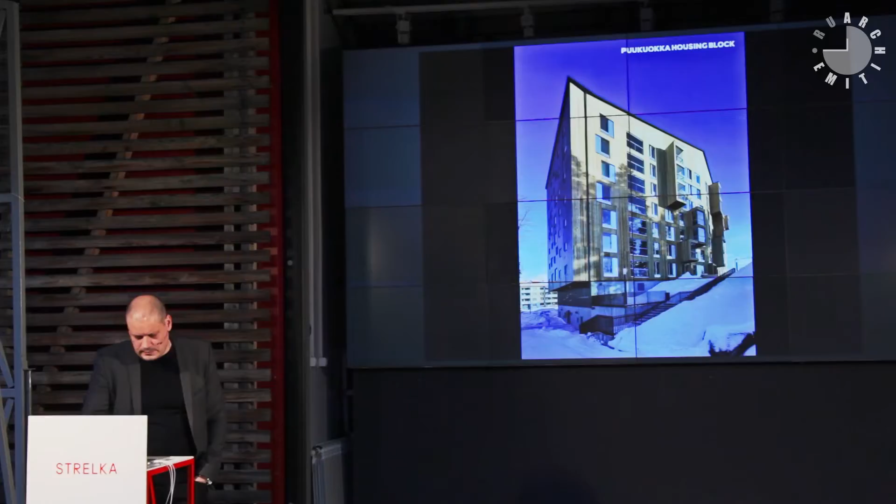All right, Puukuokka apartment block is some kind of example of housing on a large scale. Typically we use wooden construction in smaller buildings in Finland, as I think is also the case in Russia, and not so much in bigger housing projects. But in 2011, we changed the regulation so it's possible to make an 8-story building using wooden construction. So this is more about using wood on a larger scale.

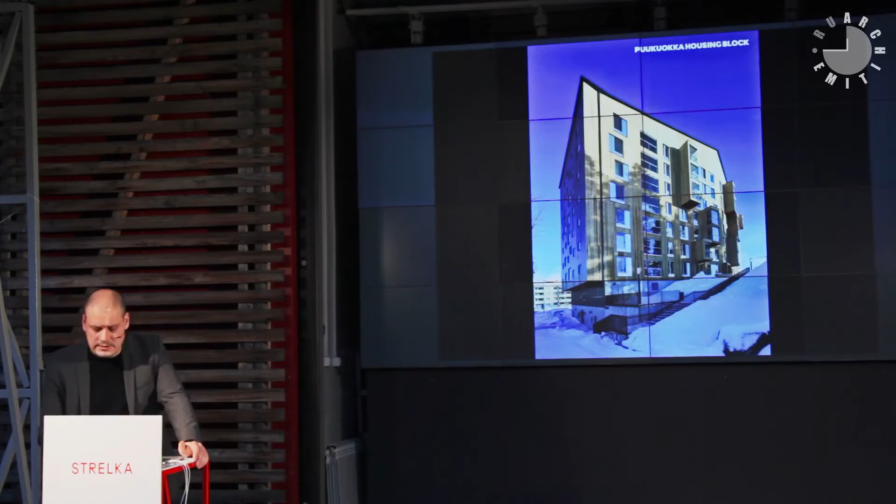We started that quite a long time ago, and the process of how we started was quite funny. We had just finished the Kuokkala church, a wooden church located very close to this site. Jyväskylä is in the middle part of Finland, with 150,000 people living there, so in Finland that's a big city. But this is the nearest suburb of Jyväskylä center. We designed the church, and it was ready in 2010.

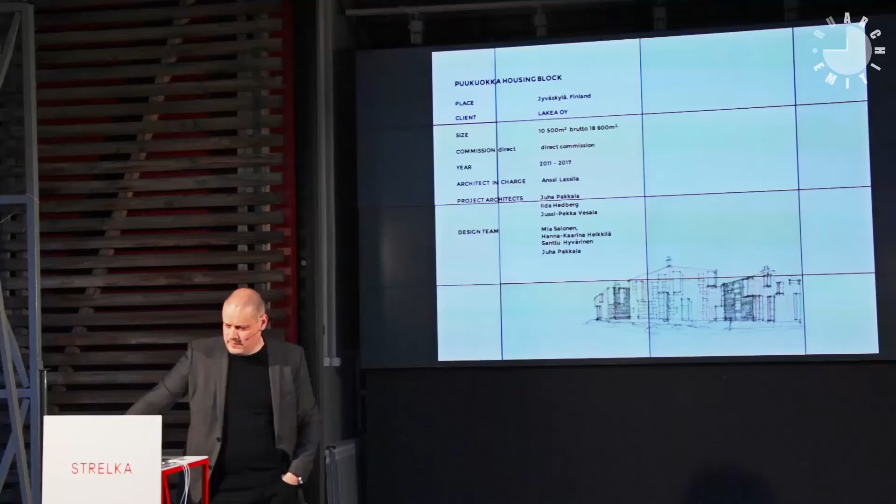There was a magazine story that one construction developer company would build a wooden housing block at this location. So I called this company and said we are architects and we want to design your housing block. We don't have any experience, but we can survive - trust me, I'm an architect.

After two weeks we started designing this. We didn't have any kind of experience or sense for using wood at that scale of building. So there's 200 apartments at 10,500 square meters.

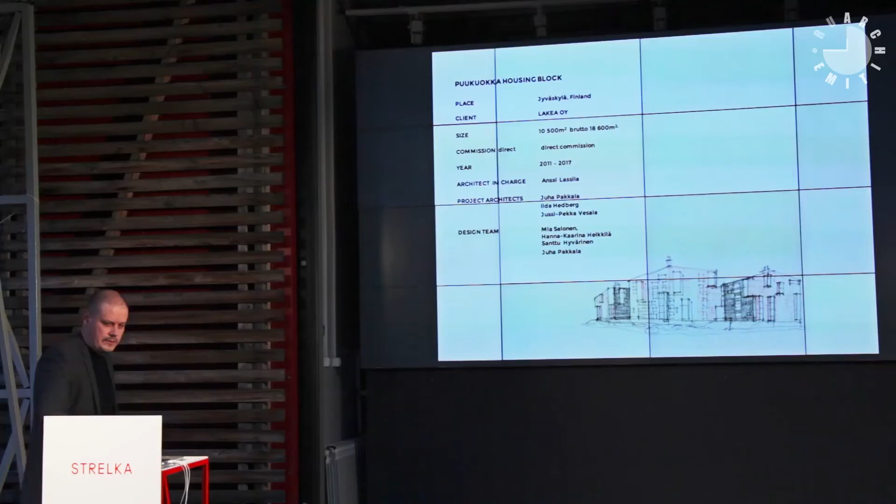At the same time, Stora Enso, by the CLT factory - there's a cross-laminated timber factory in Austria - started to make some prototyping for the multi-story element system, using these CLT volumetric cubical elements.

So we started to make very simple sketches about what's happening if you're using these cubical elements for this housing project. What does it really mean, how can we create better architecture, how can we really create a solution that starts from the materials and gives the people who live there something different than the usual housing process.

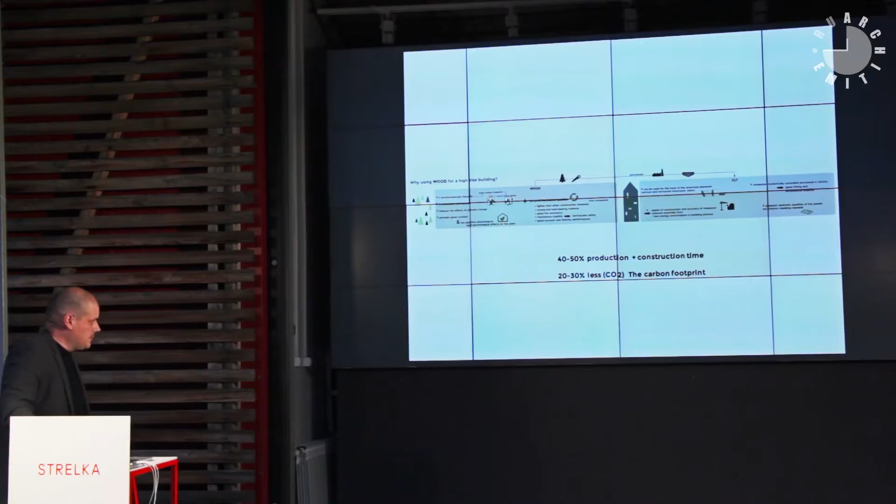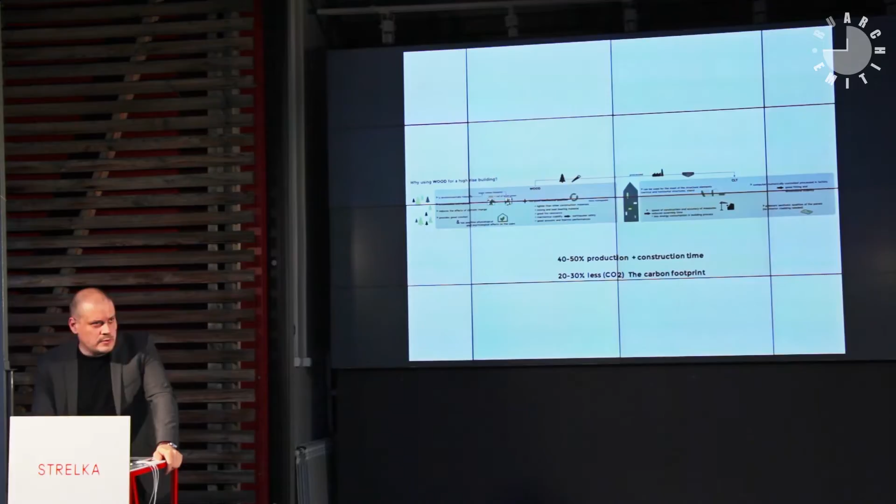And of course the question is, is there any sense to make that kind of solution using wood? But a very basic calculation tells that about 40 to 50% of all the energy or pollution comes from the construction process and construction time. So it means 20 to 30% less CO2 or carbon footprint, without even calculating the new forest growing after using this wood material. So in the future, when we must take care more and more of the environment, it really means using wood at a large scale.

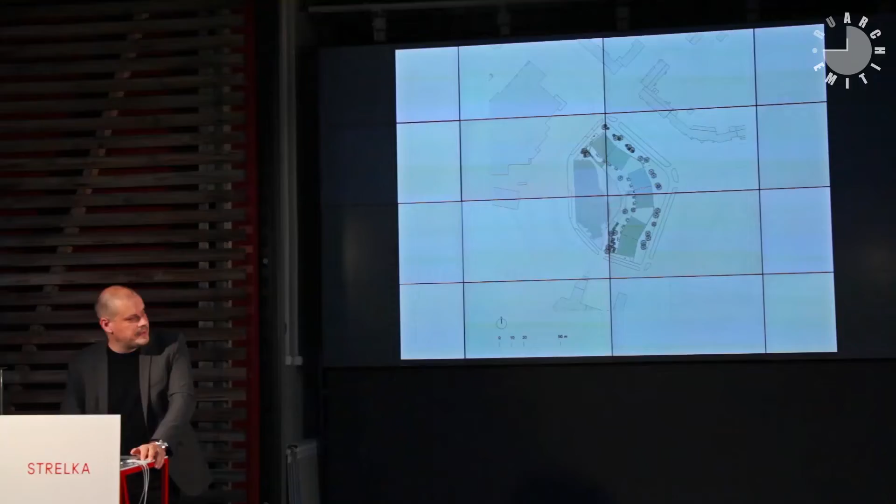We compress all the cars under the buildings, and that's the way it goes. At the end of 2014 we got this first 8-story building ready. It's a simple building - just painted spruce outside, and Siberian larch in the courtyard side, with basic ideas like that.

So we have two elements joined together to make one apartment. There's one 'wet' element, meaning bathroom, kitchen, and entrance area, and the other is a 'dry' one. Well, it works very well this way. All the technical things are integrated between the apartments and the corridor, and that's the reason the space between the apartments is bigger than usual.

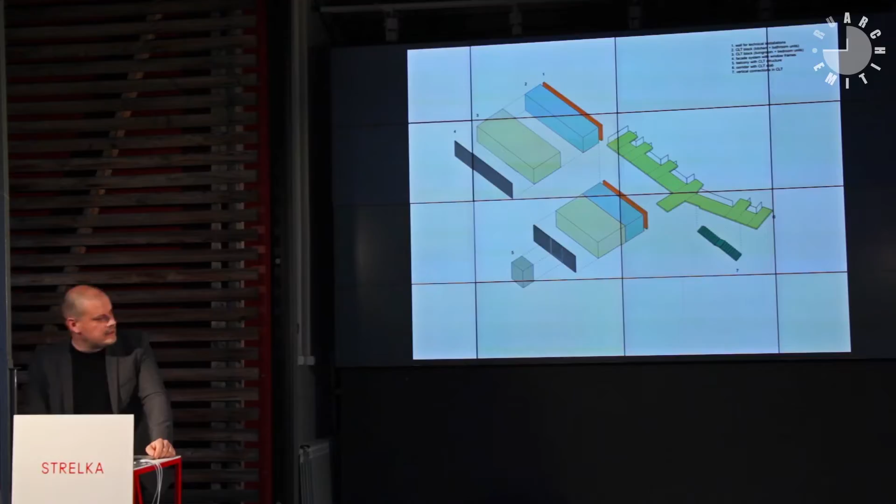When we made this kind of solution together with the city, the developer, and everyone else, we also got good regulation about the master plan, so it was even possible to get this kind of system ready.

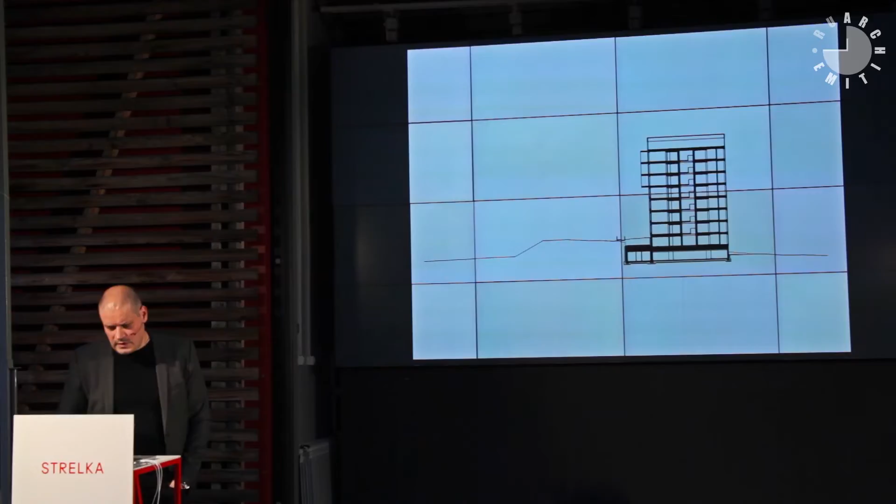These volumetric elements are really the primary structure of this building, meaning that everything above ground level is a wooden construction. There are no columns of steel or other materials, and even the elevator core is made of CLT.

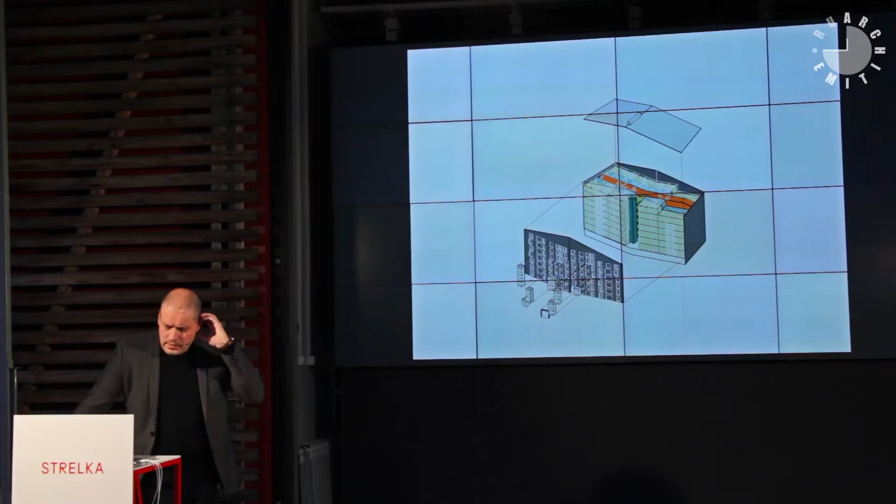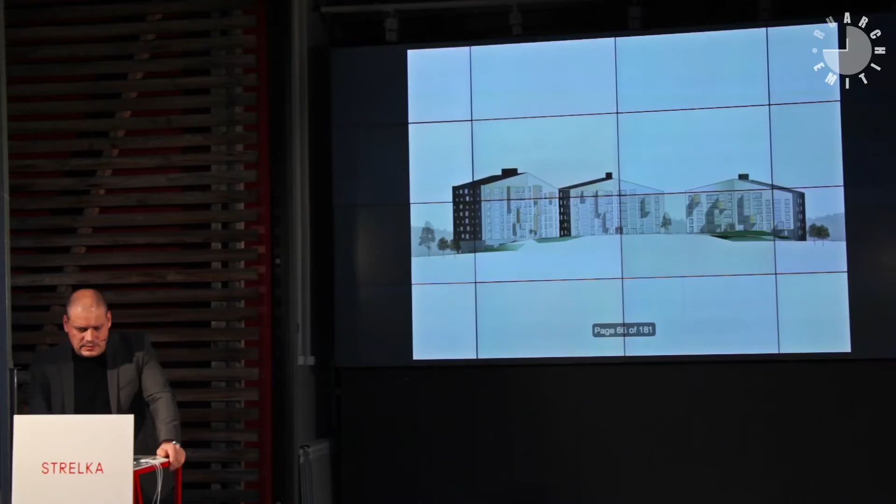Now we just got the first one ready, and the second one will start quite soon. Let's hope that the whole block will be ready in 2017.

I won't talk too much about the details because maybe it's not so interesting, but the basic idea is the dry element joined together with the wet one, with these technical things integrated in the corridor. The space between the apartments is much more spacious and has more light than usually.

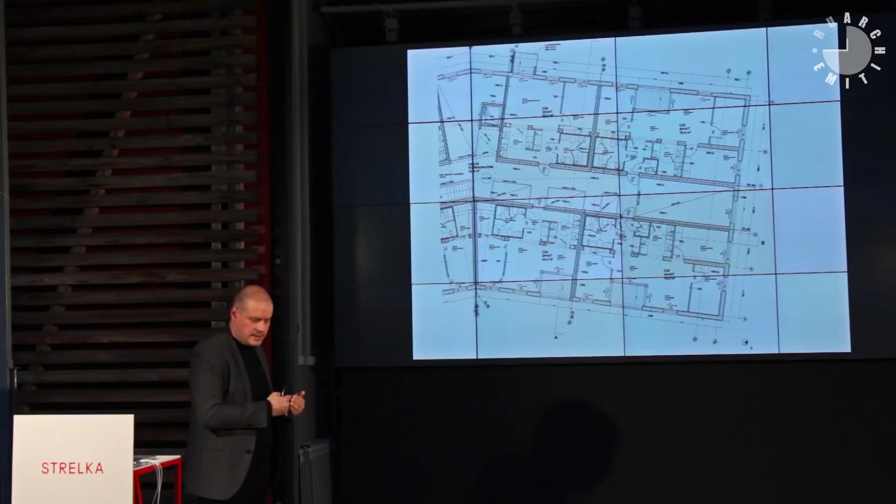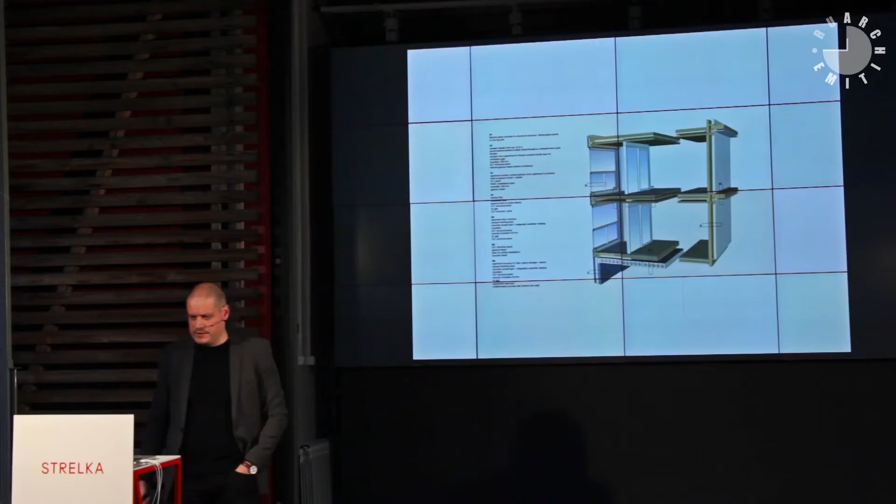It's also a semi-warm space, just because it's too expensive to keep it heated in the winter time in Finland. The basic construction is wooden - the floors and everything are wood, joined together with steel joints. So there's steel at the joints, but everything else is wood.

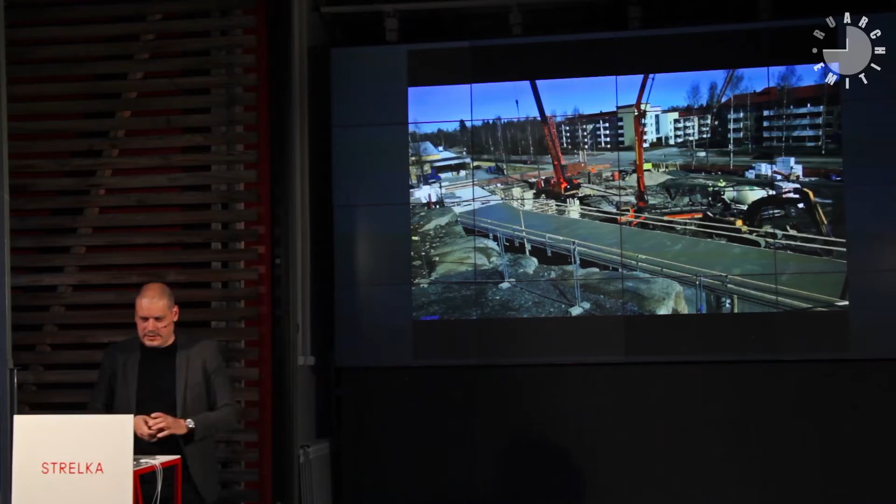What's the reason to use this material? Of course there are a lot of good points. Even in a more urban structure like this one in Jyväskylä, here in Finland - this isn't super dense, but anyway...

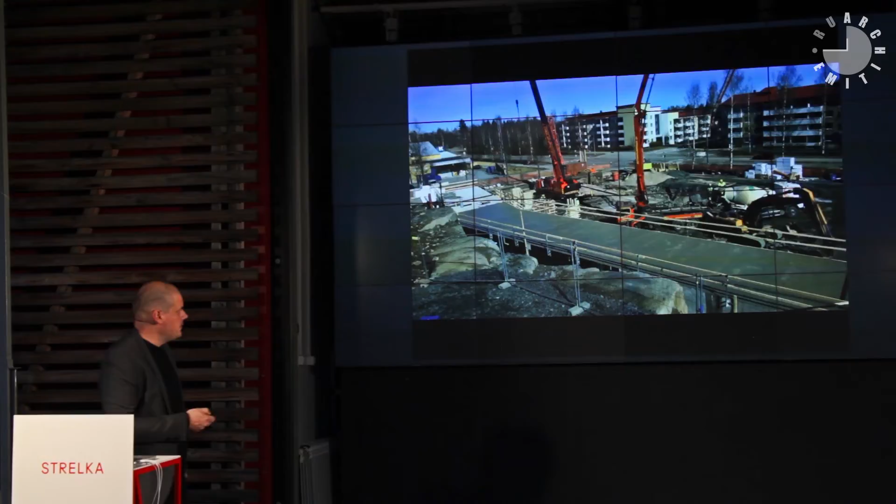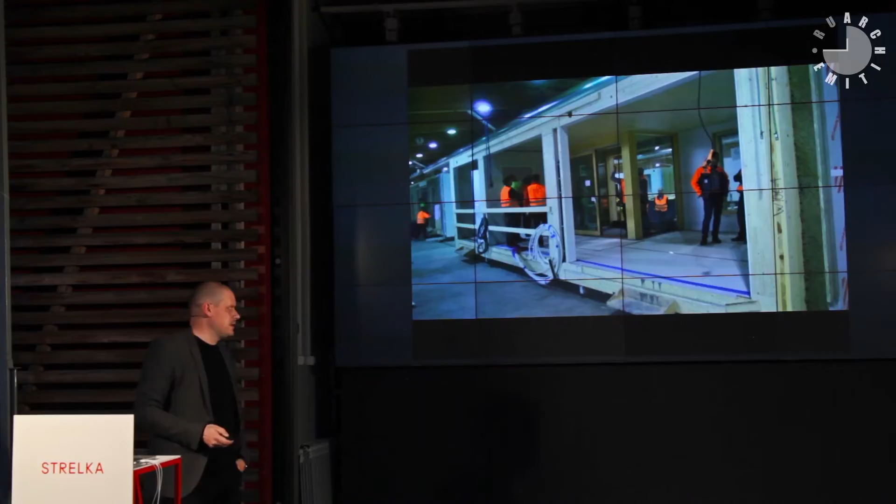At the same time they start making the concrete works on the construction site - the car shelter, the basement - they also make these volumetric elements in the factory. Everything is made ready there: all windows, all furniture, all surfaces, ceilings, walls, kitchens, and even bathrooms are installed ready in the factory. This makes the construction process very fast - it takes only half a year to get this building ready.

If you think about the more urban structure, like for example Moscow, it's less noisy, less dusty, less time for the construction process. So people can move in faster, they can use the building faster than typical construction. So there's one good point, or a few good points, when they use this kind of construction.

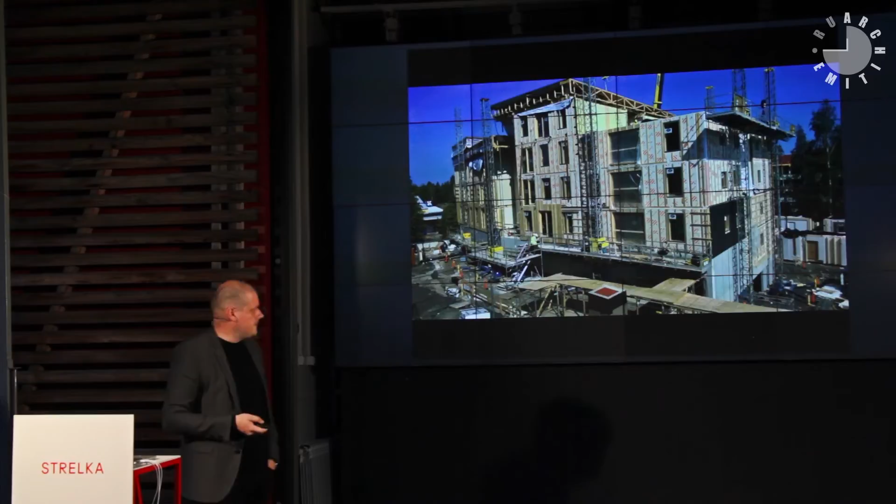In this case, we didn't integrate the facade direct to the elements, just because I don't want edges between every element. So it's prefabricated, but it's installed on the construction site step by step, when they install these volumetric elements at the same time.

Well, there's boring pictures, I'm sorry for that. Just pictures for the corridor spaces, just because this was the only place what they really made on the construction site, and the reason is all technical things are integrated in the walls, as I told earlier, and it's also the reason that there's a little bit more space than typical in a corridor.

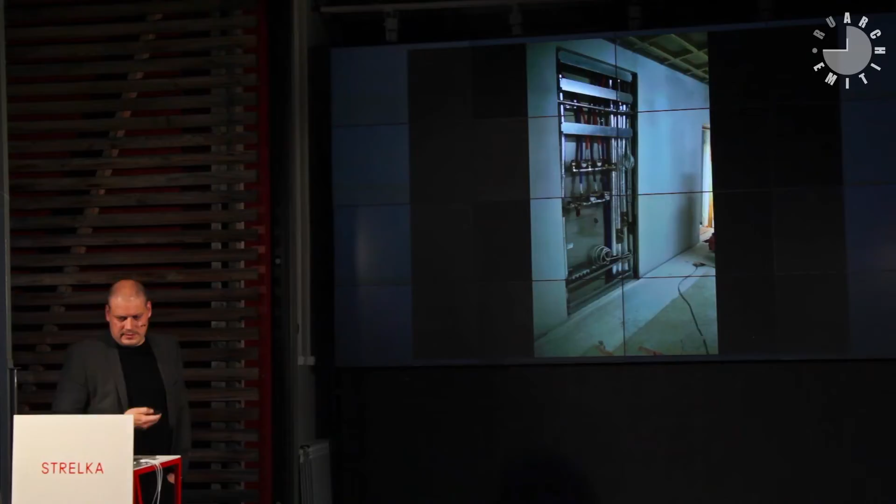And why I talk about that is quite important: if you have very effective apartments, these places where everybody can use are more spacious, more lit, more different than usually. I understand it's a quality of the living for this apartment project.

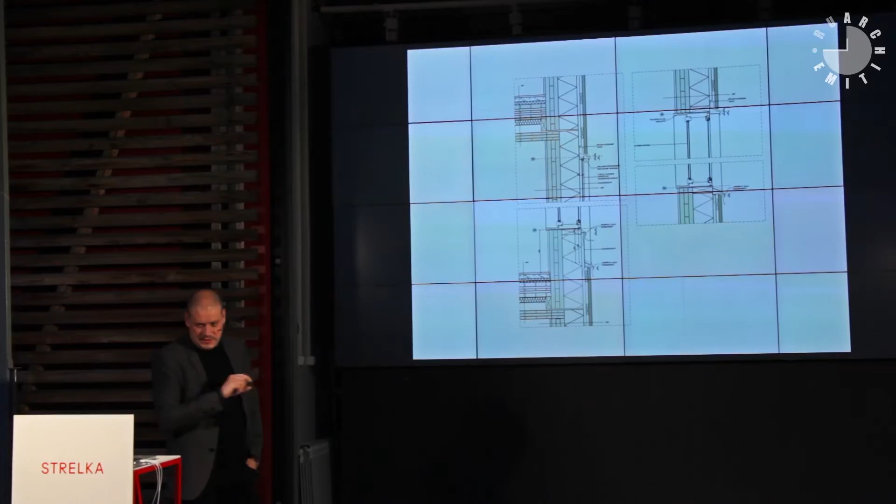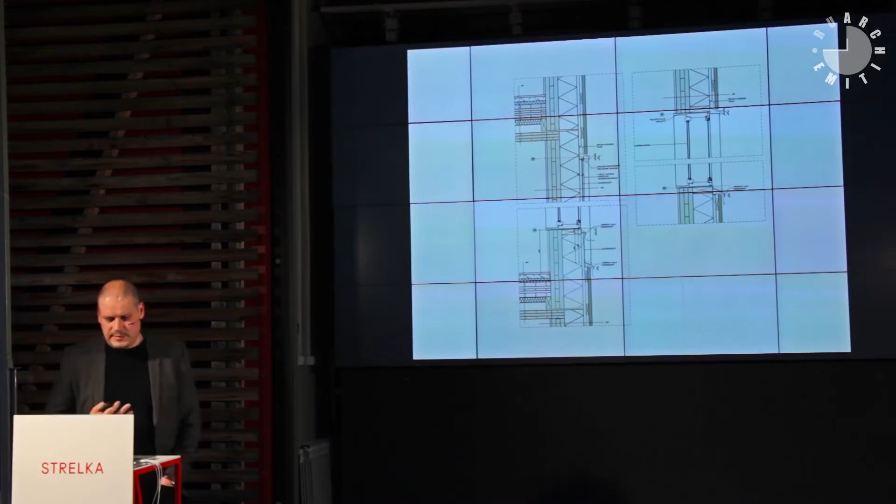There you can see the basic idea about using the CLT. This is the upper part of the ceiling, the floor. There's of course layers for the integration. The concrete is a very thin one, just for integrating the floor heating, what we need in Finland, and an air gap between the elements just for acoustic reasons, because acoustics is one question when you use wooden construction in this kind of case.

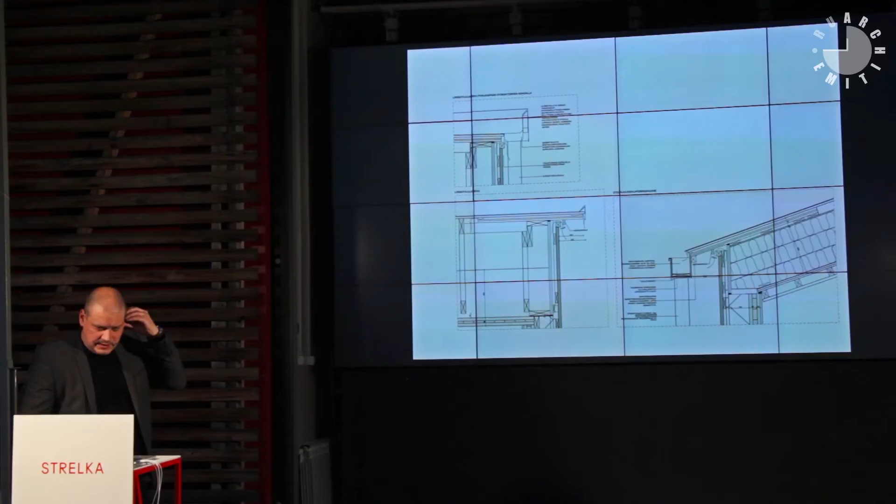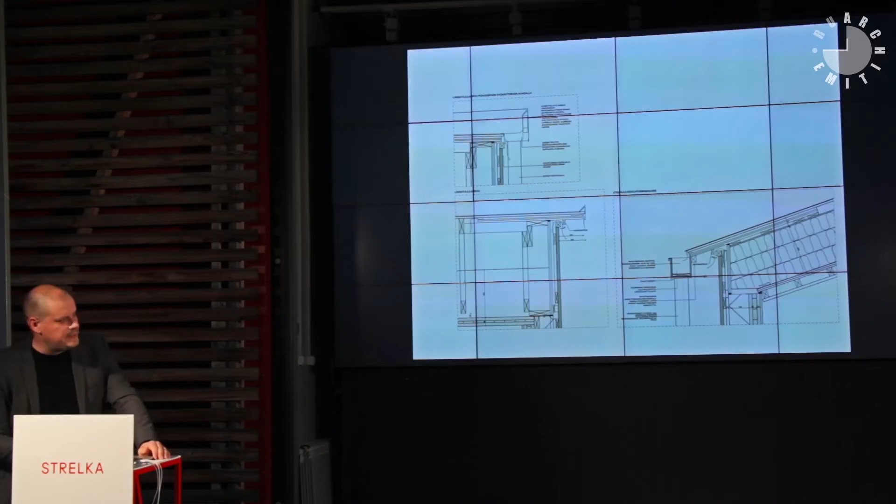And some details. Because with the wooden structure you must take care, for example, of the eaves and all kinds of details, how you join together the wooden pieces and how you really make it in real life. Just a picture of the ready-made building.

We have quite tight regulation in Finland. I don't know about Europe, but I think it's even different in every place, because in Europe, for example in Scandinavia and the southern part of Central Europe, there's quite different rules in different countries. But in this kind of place, you can just use wood on the floor, but everything else must be covered by gypsum board. And you must also use the sprinkler system for the whole building.

And this building is very simple. I mean, there is no very expensive apartment, the apartments are not low price but mid price in this location. What that means is that all the details, those kinds of things, are not very high quality. It's more a question of the quality of using the parameters and the whole solution. For example, the balcony is integrated inside the building frame in these cases, and it gives one extra room inside the apartment.

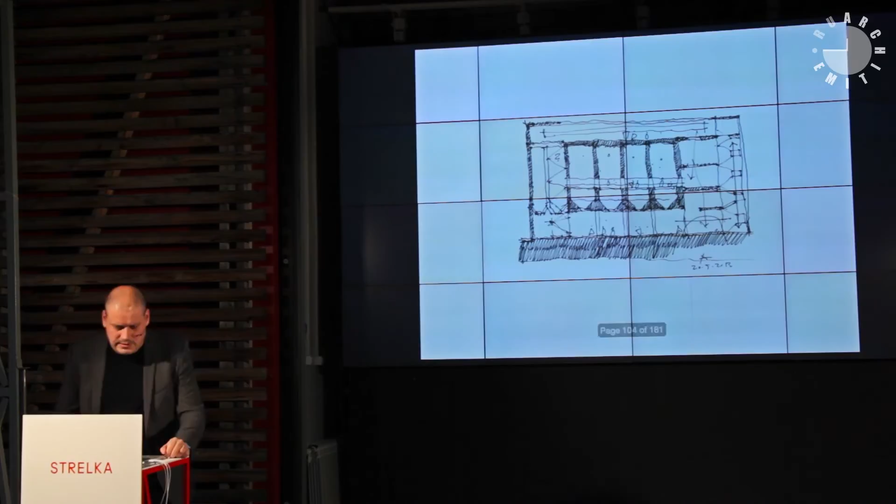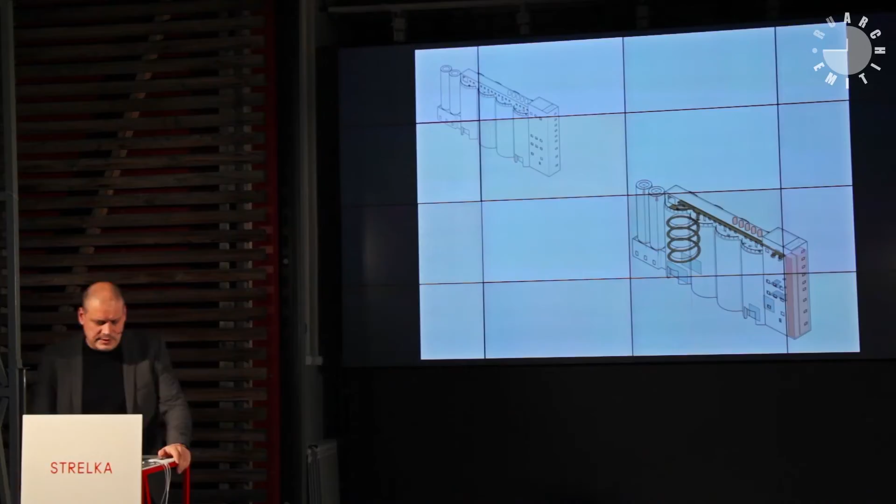So we made this matchmaking workshop, and the idea was to reuse this building for an architecture experience, just for exhibition. For example, the old silo factory was used for a very robust experience, the feeling of contrast between the old and new things. We worked there about one week, and after that the Chinese architects kept going on with the details and building codes.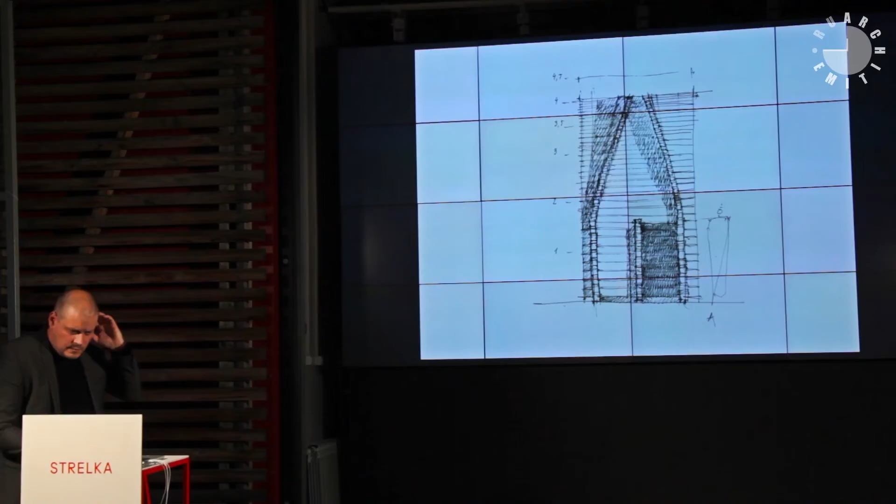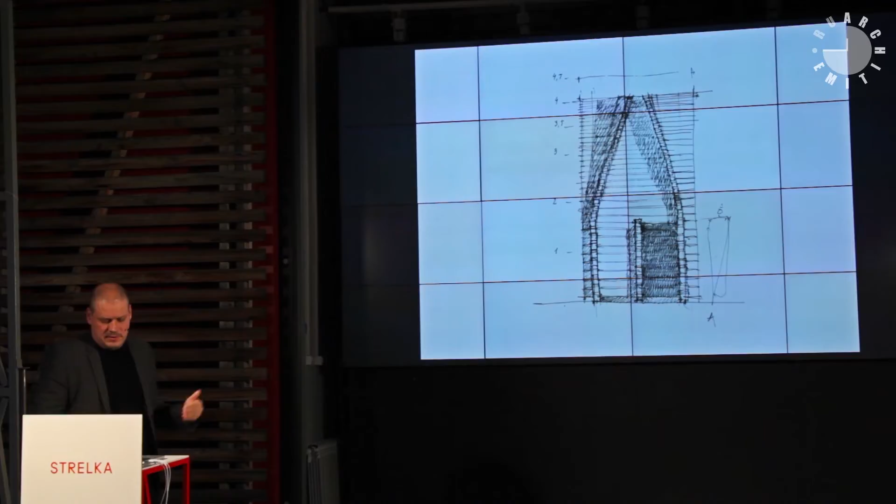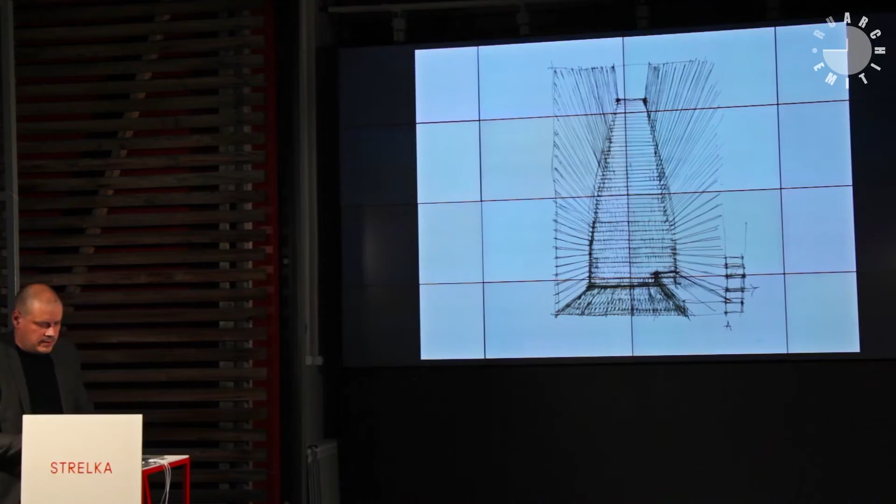OOPEAA was asked to make an installation, so we started designing a contrast between wood and concrete, to build it in Finland and transport it to China. There was also an idea to create an event between the Biennales, since the architecture of the Biennale changed. So we thought we'd make a log structure in Finland, transport it to China, and build it there. Between the Biennales, we would make a translation of this building, a Chinese variation, together with Chinese carpenters.

It's quite interesting how the process goes. This log structure used Finnish spruce, made together with Kari Virtanen, a master carpenter who has made many furniture projects for us. So we have long experience in communication and in using local material, and how that really affects things if we try to make it in China also. These things are quite nice to test as an installation, at a small scale, because there's not such a big risk of making theoretical mistakes.

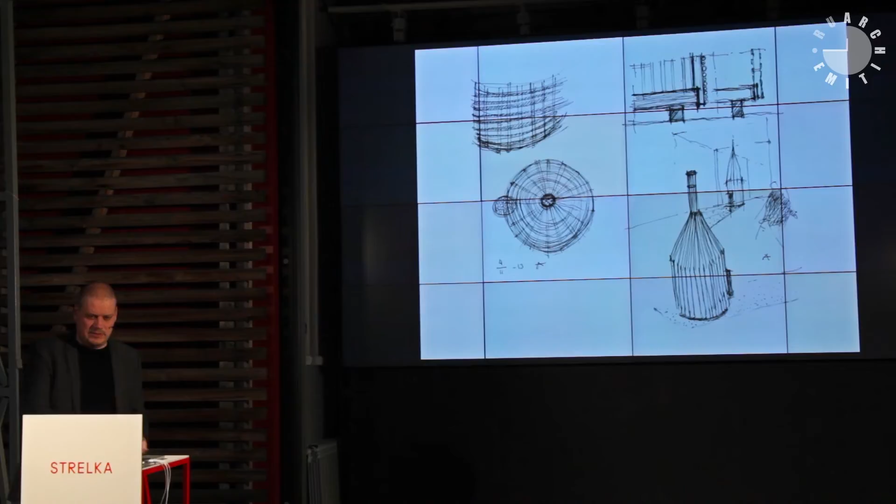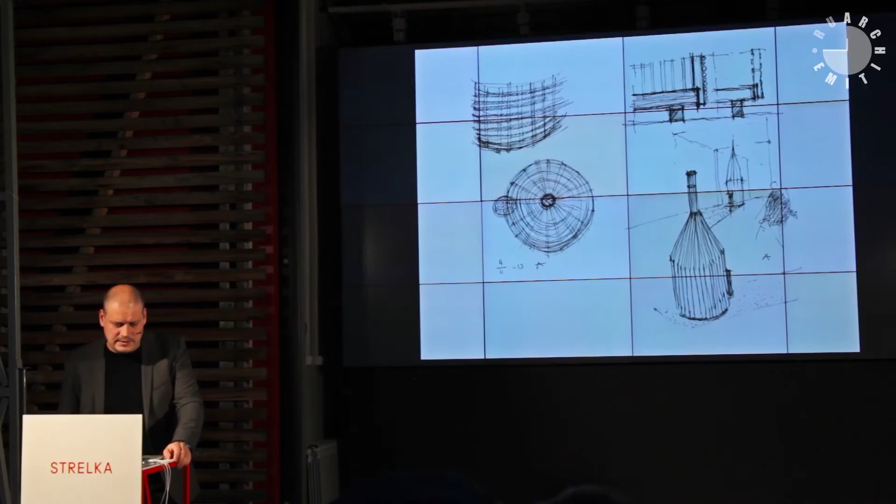Between the Biennales, they started making the installation. But first we designed this spruce log installation in Finland, and started thinking a bit about the Chinese one. The first cooperator we got in China was an old master who wanted to make an exact copy of the Finnish installation using composite bamboo. That would be interesting, but we didn't want that, because I don't think it's very interesting to find that kind of solution.

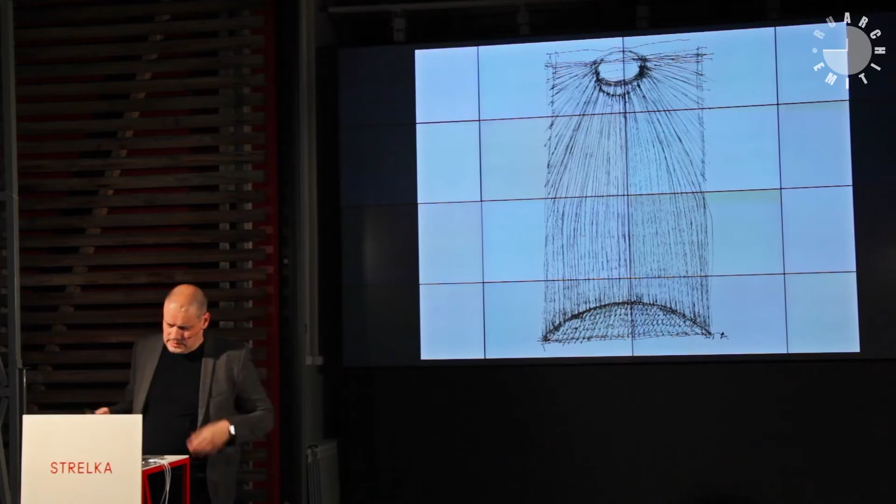So I made sketches using just round bamboo sticks, thinking about how we could create a simple space using that material, in a way similar to handmade work, using people who really know how to do something with this material. So we found Richard in China. He's an expert in using bamboo, and together with Richard and his guys we made a very experimental, simple, small installation in Shenzhen. There's also Kazunori in our office, an architect from Japan working in China who speaks Chinese, which of course helped communication from our perspective.

Step by step, over one week, they made this primitive hut using bamboo. Finally, I think it was a great combination, a very simple way to use the material and create a similarly sized space but with a totally different feeling. It's very primitive, simple architecture, showing what you really need even at a bigger scale, or in any kind of project you can do.

A year later, we transported this installation to the Venice Biennale 2014. It's a different context, in the middle of nature, with different themes. We also used the Aalto Pavilion to tell that story, what is behind everything, and used the pavilion as originally intended, opening the part between the doors and the pavilion. It was really nice to do this at the Venice Biennale too.

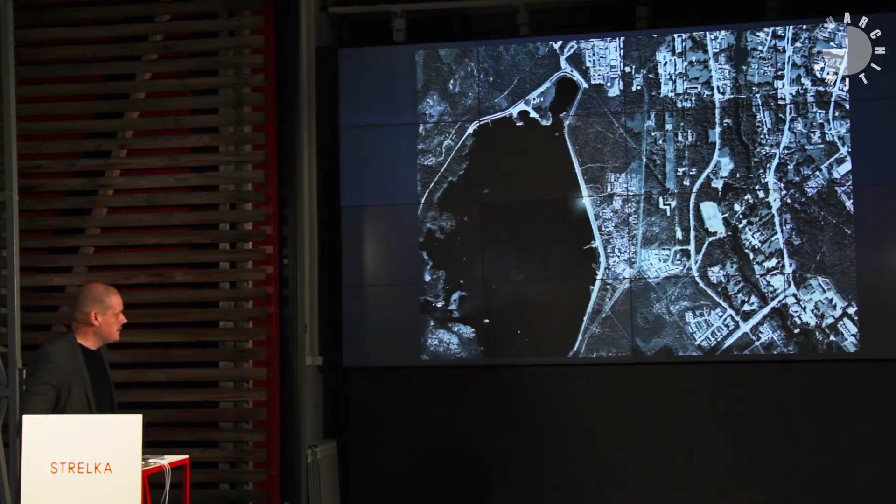The lake was made in the 1970s and is up on a hill, a strange location in many ways. The reason was to generate electrical power, but also to control the water level around this very flat area—two reasons for making the lake in the 1970s. Anyway, it's a place where people hang around, running and skiing in the wintertime. It's also a place where people who can't otherwise get around, for example those using wheelchairs, can move and enjoy nature, because there's a place they can go around even like that. So the basic idea was to make a deck where you can see the landscape in a different way than just walking around.

We tried to make a tower in this wasteland, but it felt very boring.

The problem is that if you want a solution everybody can climb up, it will be very big, with ramps or whatever, and it's quite tricky.

So the simple idea was to make a huge periscope so everybody can see the landscape without climbing up a tower, like a periscope or watching tower.

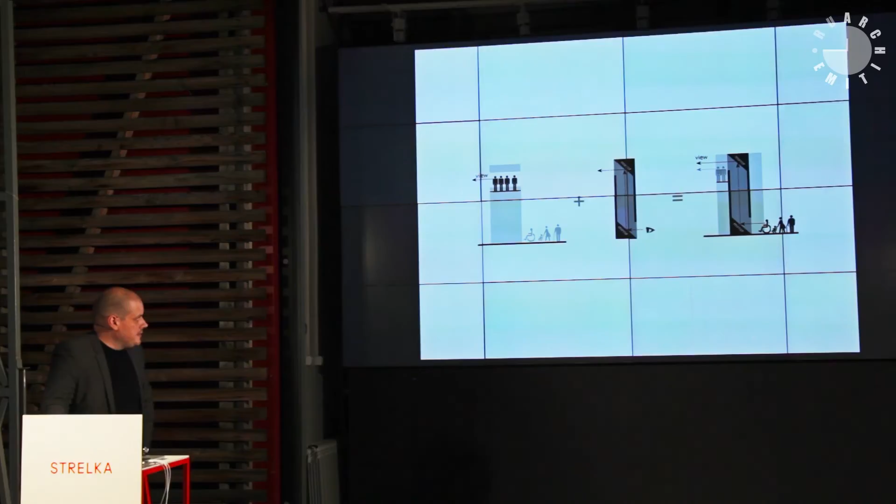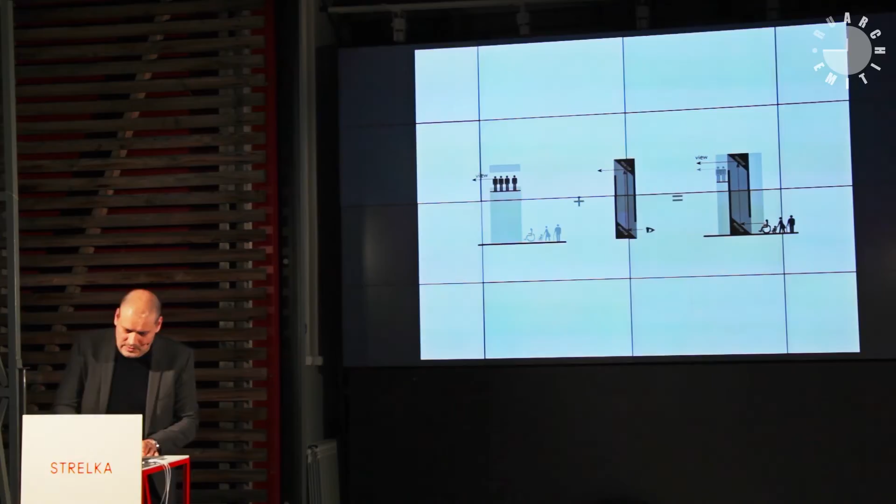It was a little bit like a joke when we started the design process. Everybody can make this kind of periscope when they're a kid, I made periscopes sometimes, but not at this scale. It's 30 meters high. Anyway, the client liked it.

So they simply said they wanted to build it, and we started to make real drawings.

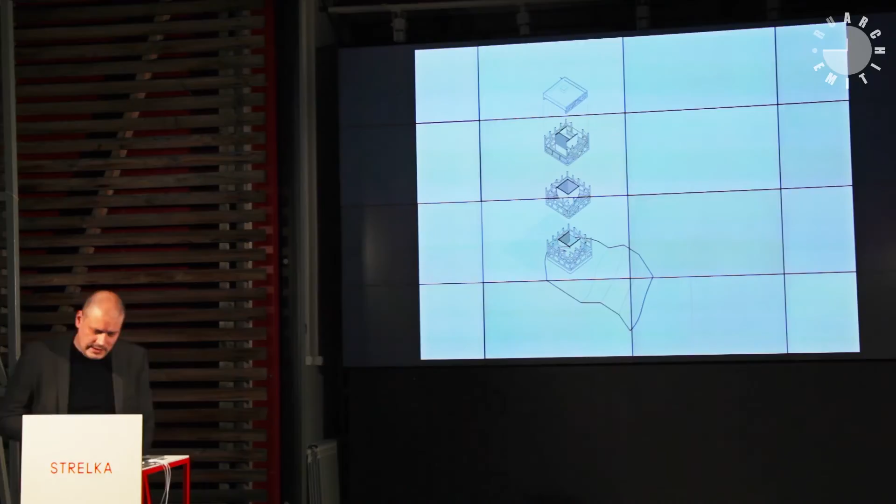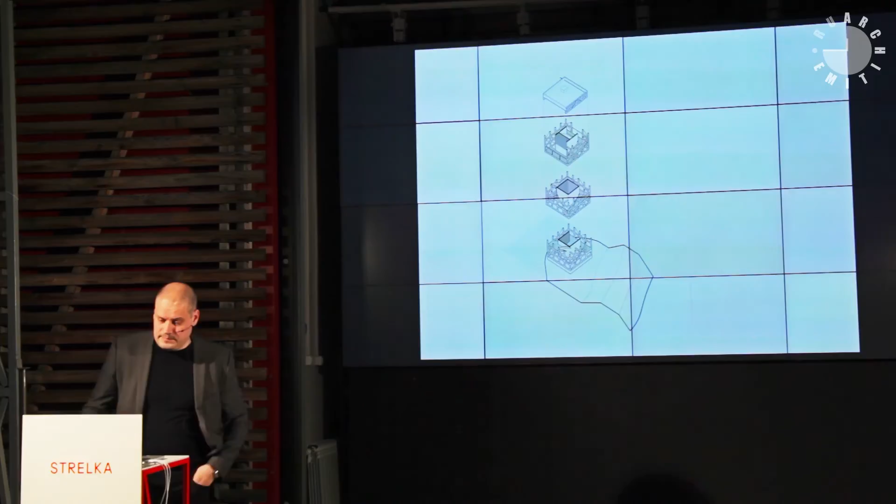The idea was to make three different elements, or even four since the roof is independent, using CLT cross-laminated timber in the periscope core as the primary structure of the whole building, with some cone-like systems around it, also used for the periscope tower and for seeing the view around the area.

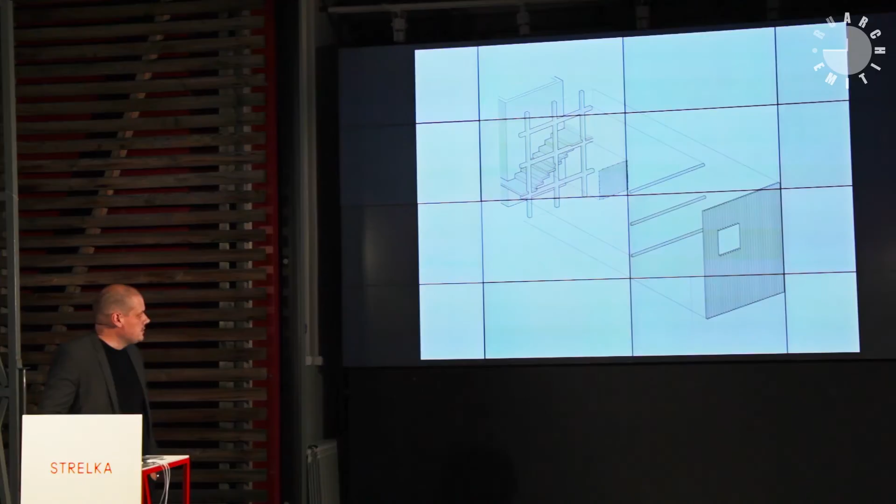For the exterior, we just integrated wooden parts and bricks at the entrance as facade material, with some openings or details. There's a picture where all facades are open so you can really see what kind of experience this simple building gives.

We made models because this construction went to an exhibition in Japan, in Kyoto and Tokyo, at the end of last year, and it also got a prize there.

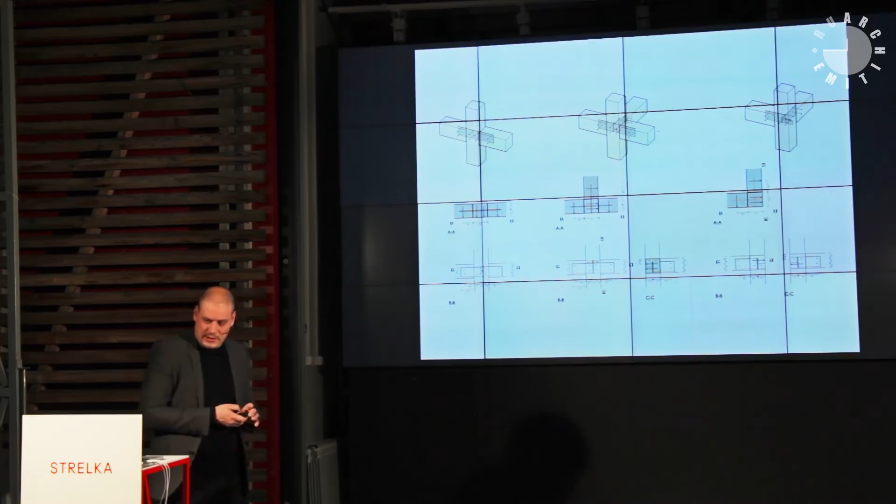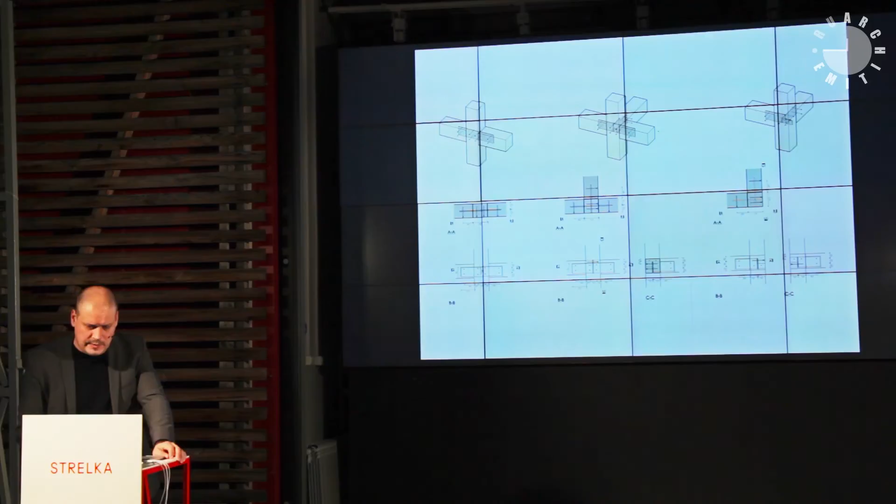It was quite interesting to find nice solutions for these wooden joints together with construction designers, since we didn't use ready-made pieces and didn't want the joints to be visible. So there's just a very thin steel plate between the wooden blocks, since there are many joints around this periscope.

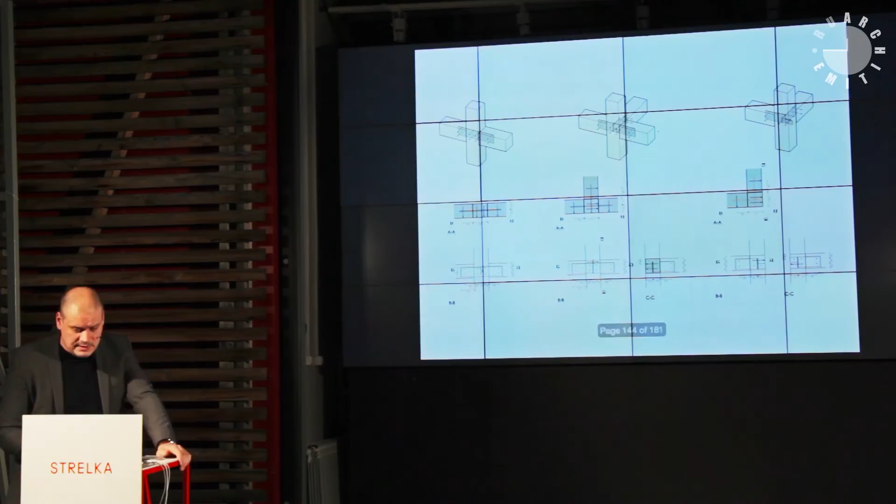There was also a social perspective in this process, because the people who studied to build it were like a school, and they built this periscope. People in their 70s worked alongside youngsters, and they really took care during the building process. That's great, because when they make something meaningful for local people and for everybody, they really start to respect the architecture, believing there's real meaning behind it, and they're very proud of what they built.

In the best projects, there's always a social perspective behind great architecture, I believe that. There are plenty of things that aren't so social, but in these best pieces there's a good social background.

Finally we got it ready, and the youngsters really did great work. This small structure works surrounding it quite nicely, giving access to this dam area, which is quite critical and difficult to use, letting people get closer to the water, enter, and experience the view through the periscope, then climb up to see different things from different places. So this is a building without any conventional function, but it's about how you experience the landscape.

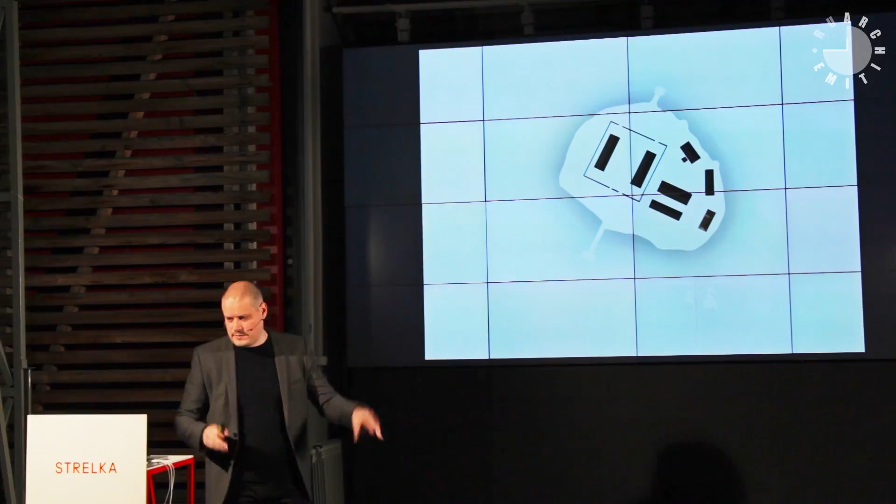There are also two other projects that are just ready: Löyly, and also another one very close to the Stora Enso building, which also has pools. But this one is a little different, because it's only 10 minutes by boat or ferry from Market Square to Lonna, yet you really leave your daily life behind when you enter there, because it's more like wild nature.

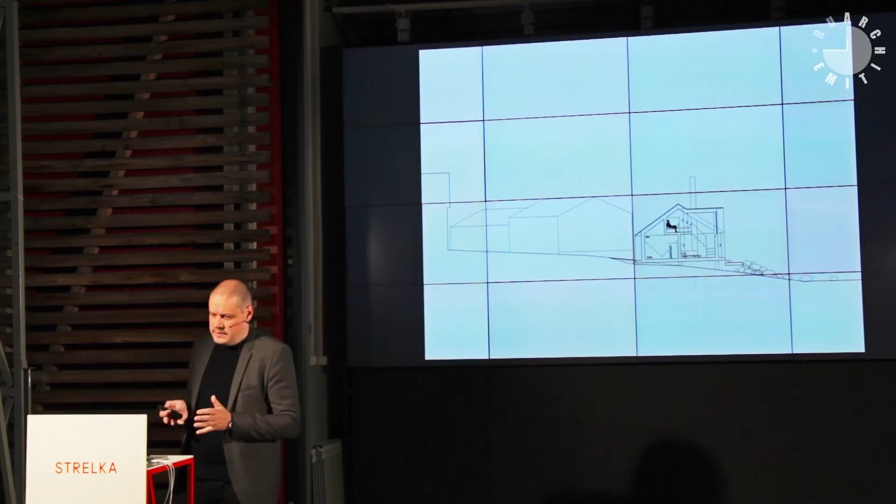The basic idea is just to make a very simple and very shy building in this location, but in a way that really creates an interesting way to use the sauna function as well.

Most of the buildings in this location are made of brick, but this yellow one is a wooden construction, a very great work indeed by a Russian client. We wanted to use wooden construction for this one too, so we used the log structure together with simple roofing with steel pipe, because all the buildings here are made like that.

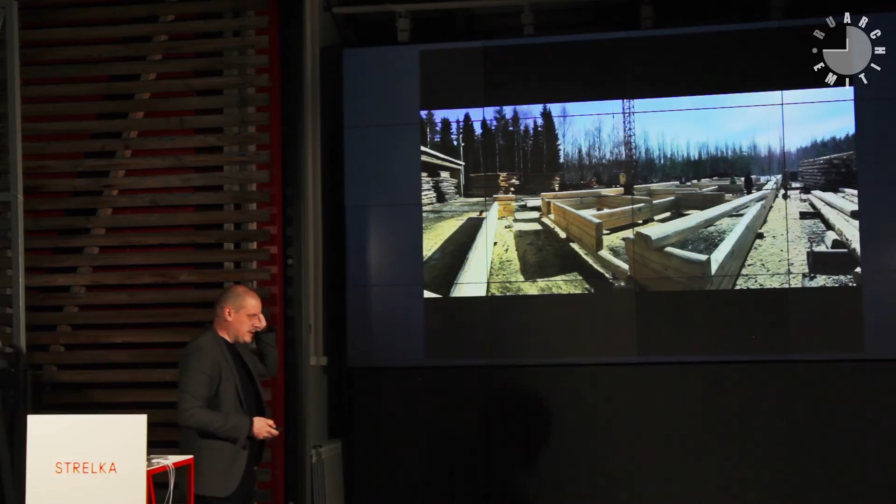This is more a combination of handmade work and prefabrication again. The log structure is made by hand, totally made by hand, but finished by axe and then installed on the construction site quite fast.

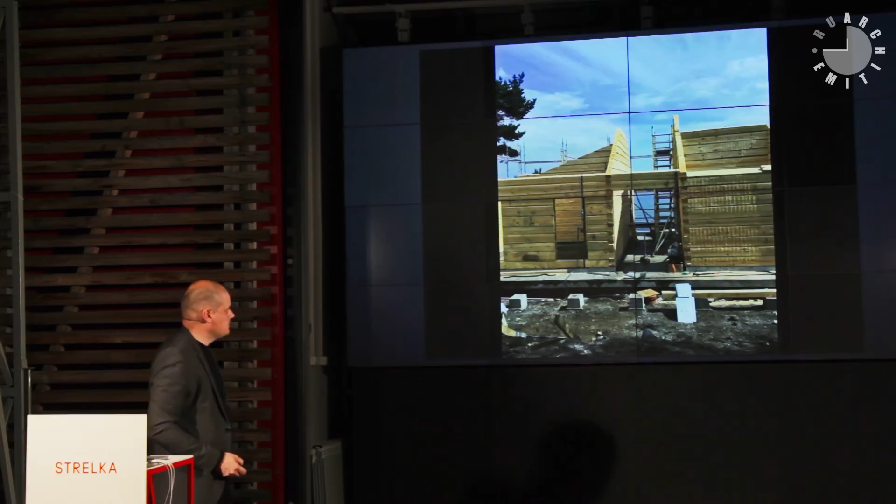There are similarities between this typical elements system and the traditional log structure indeed. There are quite a lot of things that are quite similar, but the scale is a little different.

This Lonna is still under construction. It will be ready by the end of this year, and they will start using it next summer. So it's not ready yet, but it's under construction, and finally it will create a very interesting way to use this location, which is very close to Helsinki.

I think that each of these 5 projects takes wood as a material as the starting point, but in very different ways.

And I think that, for the housing project I showed, the new methods using these modular elements make it possible to create architecture where there's some kind of human touch together with high quality.